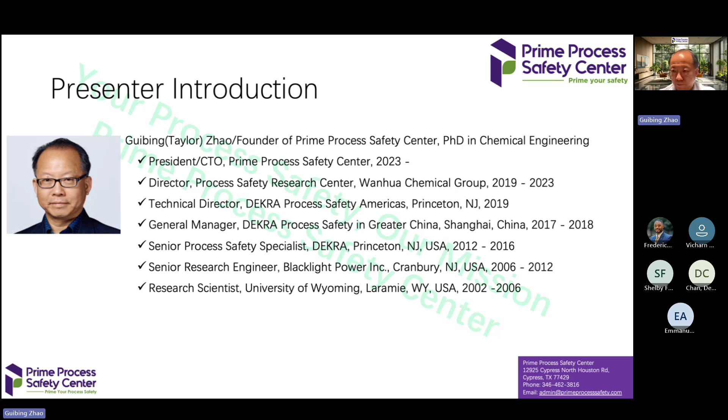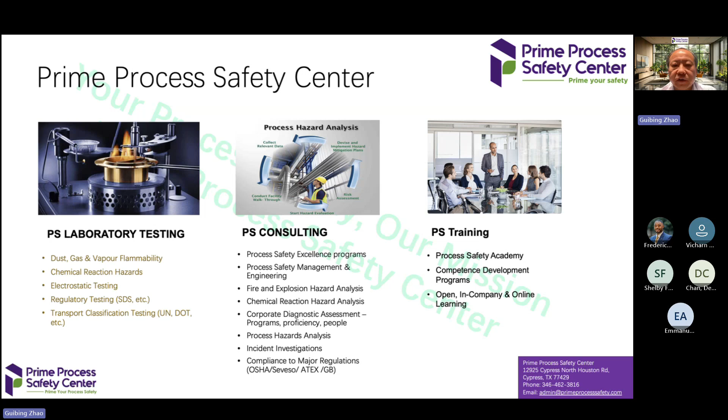So this is our company, Prime Process Safety Center. We have three business sectors. The first one is process safety testing, the second one is consulting, and the third one is training. I'm gonna give you about 10 minutes, a very quick review of what we're doing. First one is the process safety laboratory.

We have a flammability gas and liquid testing lab, and we do lots of tests such as flashpoint testing, UFL, auto ignition temperature, LOC, boiling point, melting point, and Pmax and KG. From there, we can get laminar burning velocity, and we also have a bomb calorimeter. On the right side, you can see lots of pictures of our testing equipment.

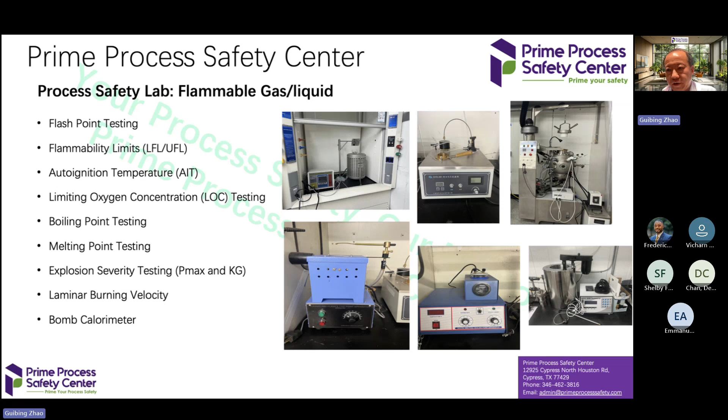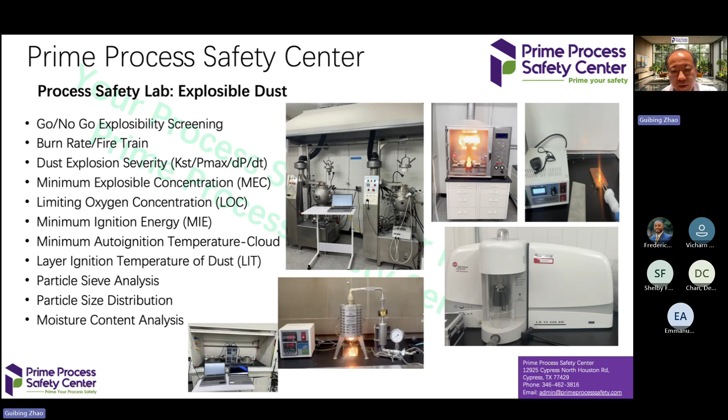We also do combustible dust testing; for anything related to explosibility or combustibility of dust, we do tests, such as go/no-go, burning rate, KSt, Pmax, MEC, LOC, MIE, MIT, particle sieve analysis, particle size distribution analysis, and moisture content analysis. All the testing equipment you can see in the pictures on the right side.

And we also do electrostatic hazard testing. The parameters we can test include volume resistivity, surface resistivity, charge decay time, breakdown voltage, liquid conductivity, flexible FIBC assessment, and we also do electrostatic chargeability tests. With all this data, we can quantitatively analyze the electrostatic hazard in the plant, in operation.

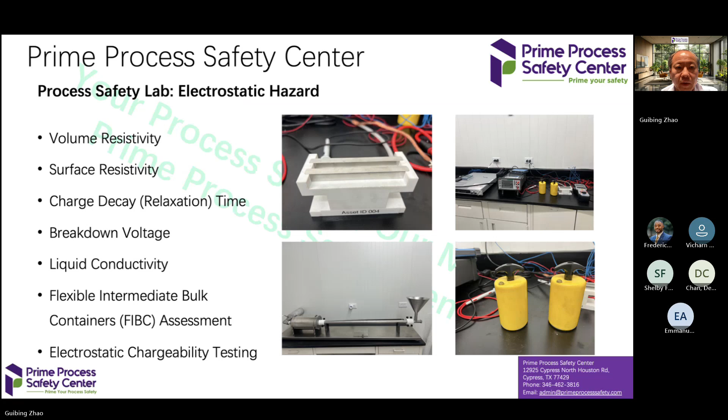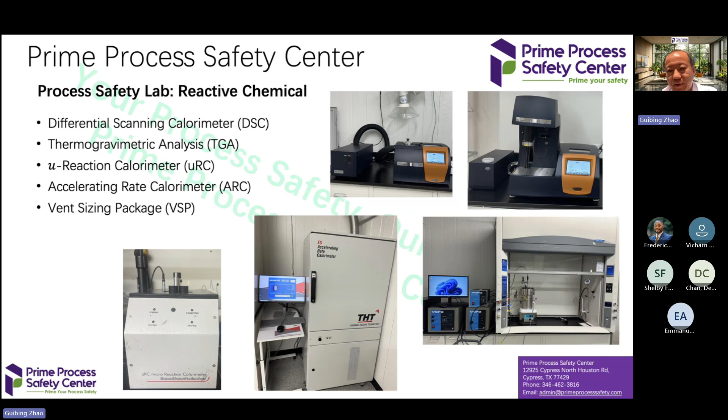We also have a reactive chemical lab. We have DSC, TGA, micro reaction calorimeter, accelerating rate calorimeter, and a VSP2 package. As you can see, all these photos are live pictures from our lab.

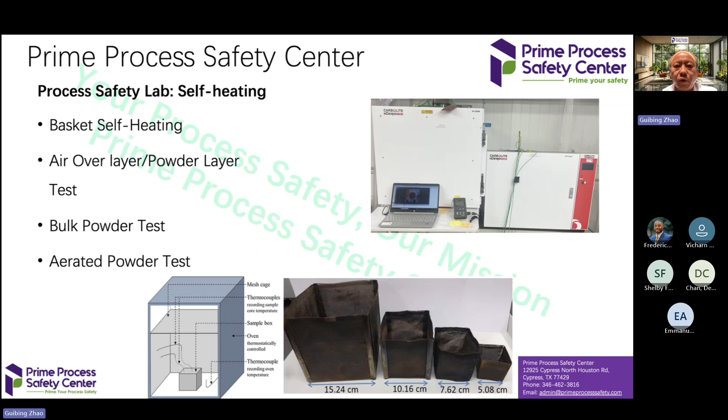And we also do self-heating tests. As you can see on the right side, we have two Carbolite ovens, and we run basket tests, air over layer, powder layer tests, bulk powder tests, and also aerated powder tests. From the basket test, we can see for powder in bulk form and at different sizes, when self-heating happens, what the reaction kinetics look like. With that data, we can help clients identify, for a specific size of powder, the critical ambient temperature which will create a self-heating ignition issue.

Previously, we just talked about the process safety lab. Let's talk about process safety consulting. In process safety consulting, we can do process safety management work, and we also help clients do process safety engineering, such as safeguard design and verification.

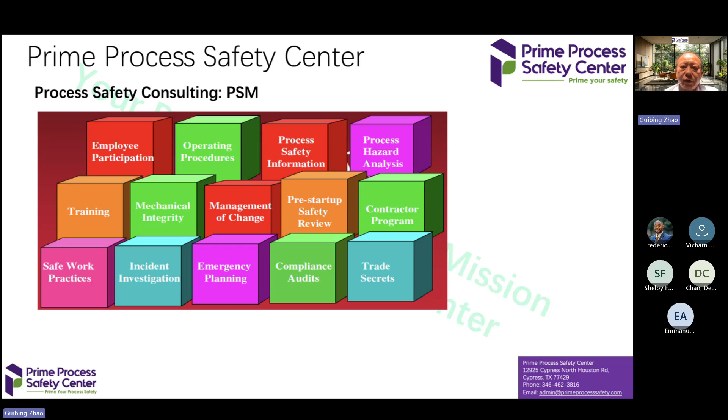In process safety management, the most critical element is process hazard analysis. This process hazard analysis actually includes several levels of analysis, for example HAZOP, LOPA, QRA, and SIL verification. HAZOP is used to identify the hazard, and LOPA is a semi-quantitative analysis of what level of safeguards you have and their effectiveness. Sometimes we call these safeguards IPLs. Not all safeguards are IPLs, but an IPL definitely is a safeguard. And with all these IPLs, what the residual risk is.

Based on that, we can do quantitative risk assessment, which is a detailed numerical risk assessment method, including consequence modeling. And with that, we also perform SIL verification for functional safety. With so many IPLs around, what is the safety integrity level, and what's the gap between the required safety level and what it is in real life. So this is for HAZOP, LOPA, QRA, and SIL verification.

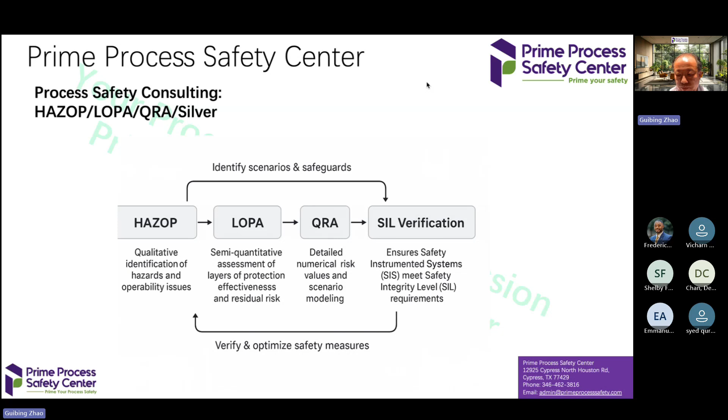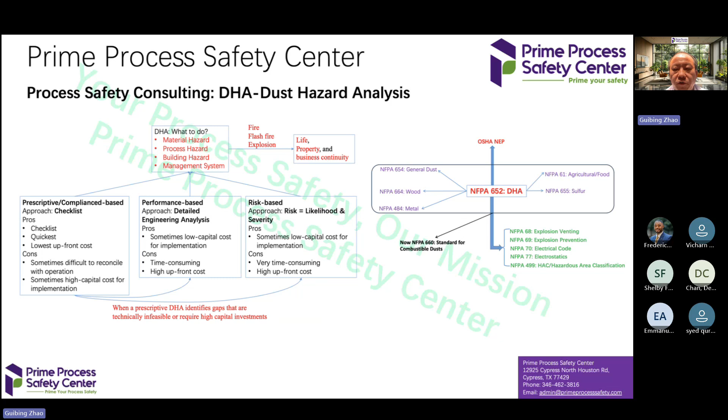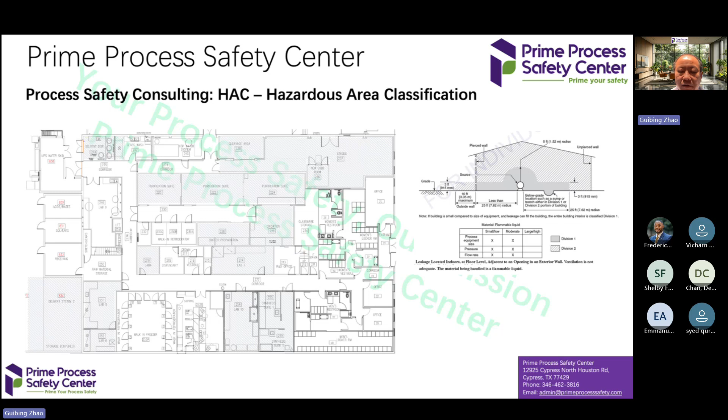And we also do process safety consulting. We also perform DHA; this is a major topic we're going to focus on today. So I'll just go through these pages. And we also do hazardous area classification, to help clients identify in the new operation how likely the plant will have a flammable atmosphere, and also what's the extent of the flammable atmosphere.

We also perform ignition source analysis. In the industry there are many kinds of ignition sources, but the most powerful ones, which we usually see in the industry, include arcs from electrical equipment. Basically, that's related to hazardous area classification. And also you can see electrostatic discharge. This happens a lot as an ignition source in the industry. So we perform ignition source analysis to help clients.

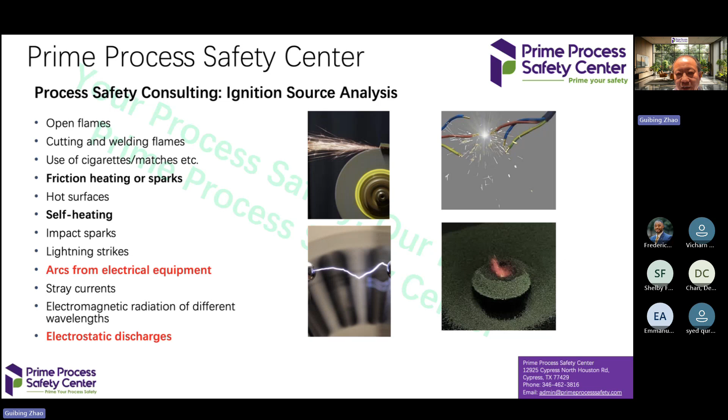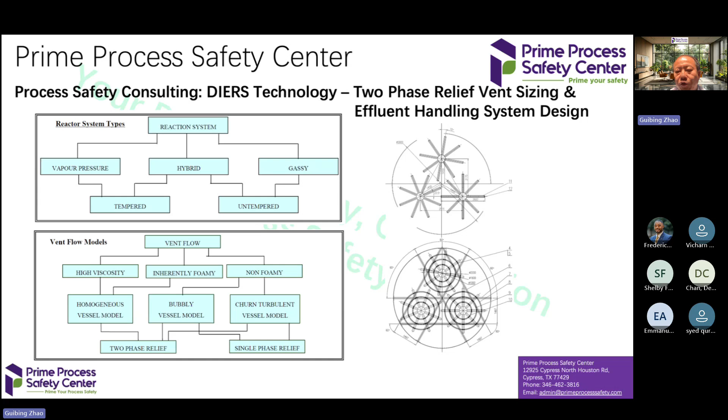And otherwise, we can perform DIERS technology, using it to size rupture disks or pressure relief valves. And also we help clients design effluent handling systems. On the right hand side, you can see this is actually a sparger distribution. We designed a quench pool for clients to handle pressure relief system effluent.

And we also perform incident investigation. As you can see on the left side, there are two pictures. On the bottom, the pipe is intact, but on the top, you see the pipe was burst. This is exactly from a peroxide explosion, which split the pipe and caused a big event. On the right hand side, you can see two dust collectors. One is intact, another one is burned, right?

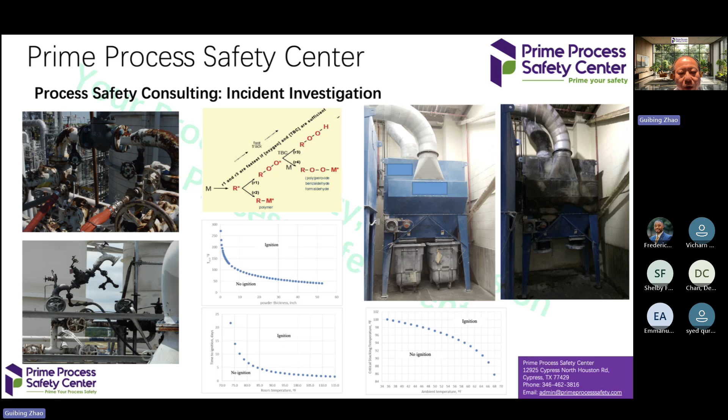So for this type of incident, our incident investigation is very different from general incident investigation. We go deep, dig into the mechanism, and find exactly what's going on in the plant, and help clients accurately identify the problem, and then recommend the accurate safeguards to prevent this from happening again.

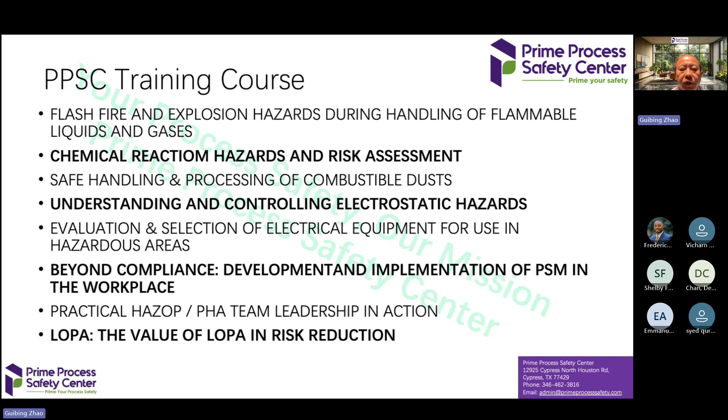And the third sector of our business is process safety training. We have developed lots of process safety training courses, but we're still expanding our training course scope. And from July, we're going to formally deliver our public training courses, either virtually or on-site. So that's basically what we're doing at Prime Process Safety Center.

And this is the main content we're going to deliver for cost-effective DHA. First, I'll share some background, and then we'll talk about the combustible dust hazard, and also review NFPA 652, nowadays NFPA 660. I think probably many of you know it. And I will talk about three methods of dust hazard analysis: prescriptive, performance-based, and risk-based DHA. And what is cost-effective DHA and how you should do it, because DHA methodology is quite controversial in the industry, like what method is best. And finally, we'll give the summary of our talk today.

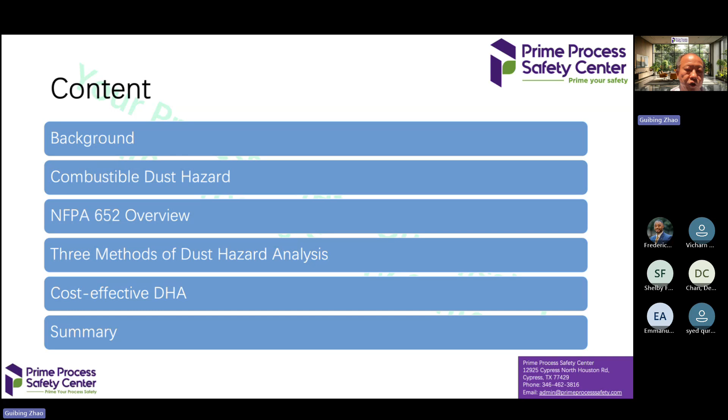So first, to give everybody some background about incidents from dust explosions in the industry. This is from Dust Safety Science, and the data is from the 2022 Combustible Dust Incident Report. You can see the US, Canada, and international, from 2018 to 2022. In the US, fires, explosions, injuries and fatalities go down yearly. This is quite true because the U.S. puts very strong regulatory requirements on the industry to prevent dust explosions.

The Canada data is also trending a little bit down, but it's fluctuating. But globally, you can see the fire and explosion incidents jump back and forth. So from this, you can say globally, dust explosion is definitely a serious issue, and we should pay attention to it.

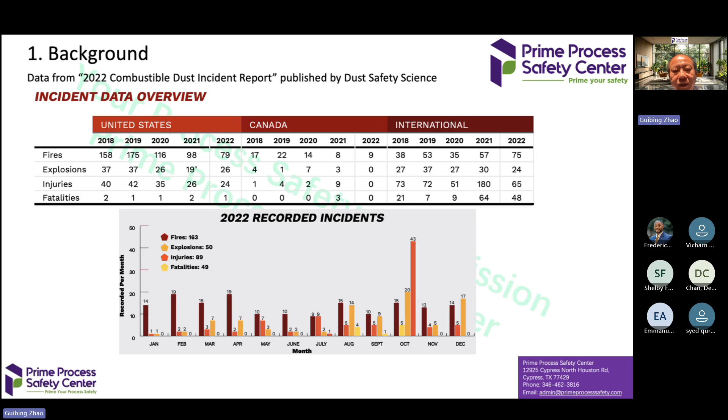The bottom line is the figure for each month in 2022, recording different incidents. For example, in 2022 there were 163 fires, 50 explosions, 89 injuries, and 49 fatalities. But this is only what could be recorded. Everybody knows incidents occur and sometimes people don't expose them, so we don't know. The actual data should be far worse than what we see here.

And from a material point of view, most incidents occurred with food products. The second could be wood products, and the third could be metal or something else. So actually, among dust explosions in the industry, food is a lot. Food occupies a big chunk of all the incidents.

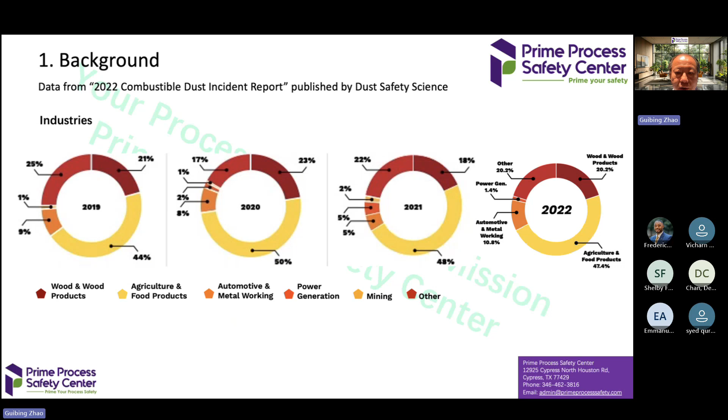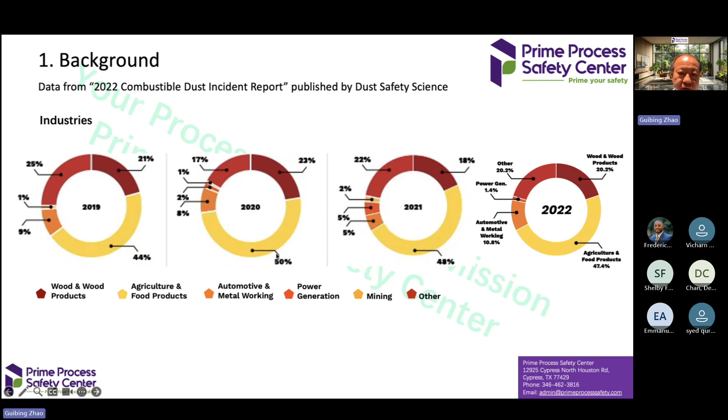As you can see, year by year from 2019 up to 2022, this data changes a little bit, but not significantly, which means the food industry is probably still the worst industry for dust explosions. And this is for industries. This matches the previous data. Food, agriculture, and food product industries have lots of incidents, almost 50% of all industries. As for equipment, we can say the worst case occupies a very big share.

The worst equipment could be like a dust collector. It occupies a big chunk of it. Dust collector, and the second one could be dryer. And the third one is like a silo or other storage. Then you can say other things like elevator, you see.

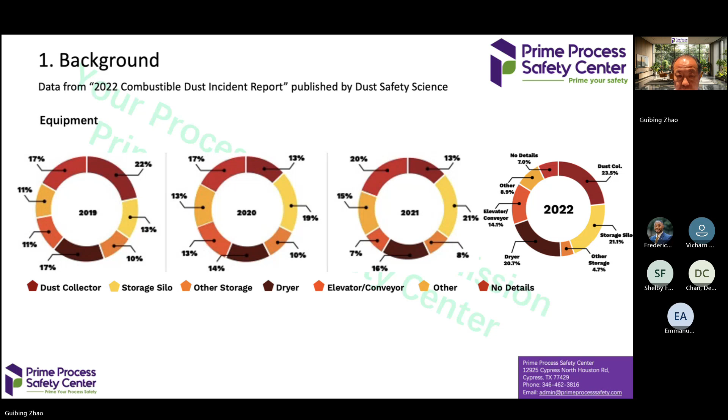So dryer and dust collector definitely are big chunks of dust explosions. This is from recorded data. And this is what's going on for equipment.

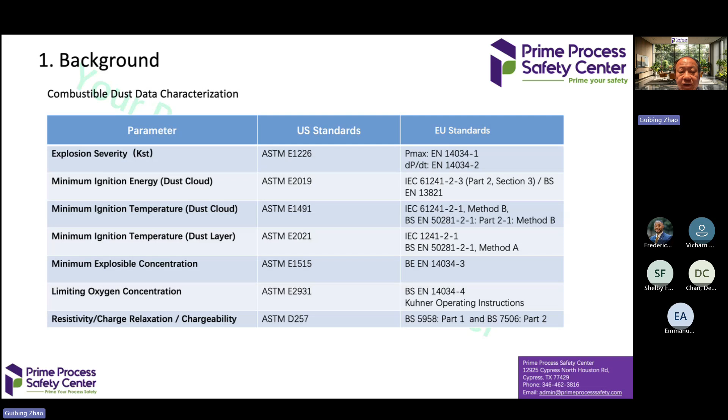So as for combustible dust characterization, before we do any dust hazard analysis, we have to know the material property, material combustibility or explosivity. So for all this, in the US we have ASTM standards for all these parameters, such as KST, MIT, either cloud or layer, and also MEC, and also LOC. We have standards. In Europe, they have different standards for it.

So dust explosion hazard assessment method has been controversial over the years. The major concern in the industry is the cost for DHA and also the cost for getting testing data. I mean, should we do all these tests or only part of them? This is a cost. And also the cost for improvement: after DHA is done and there is a recommendation, we need lots of installation for safeguards.

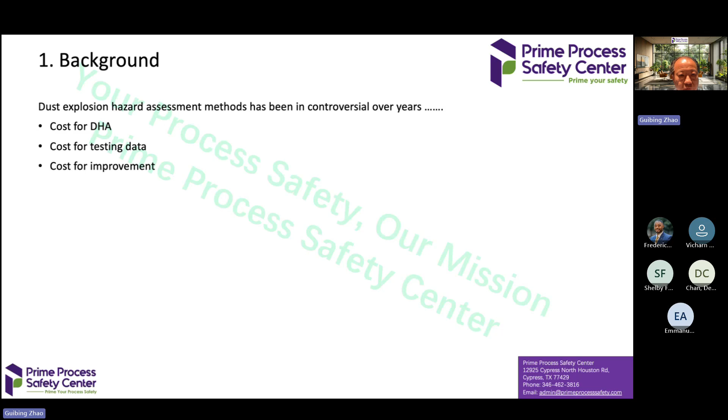So combustible dust hazard, as everybody probably knows, if dust is combustible and we have fuel and ignition, this will only create a fire. For example, a pile of dust on the floor in the air environment, if there's an ignition source, will give a fire. If we suspend the dust as a cloud in an open space, or in an enclosure where the dust cloud volume is very small, we will have a flash fire because we have no pressure effect.

However, if we suspend the dust in an enclosure with confinement, like a big volume of combustible dust cloud occupying an enclosure, for example in equipment or in a room, that will create an explosion. Between flash fire and explosion, the major difference is the pressure effect. However, from the mechanism point of view, flash fire and explosion are the same. Basically, there is flame propagation in the suspended dust cloud.

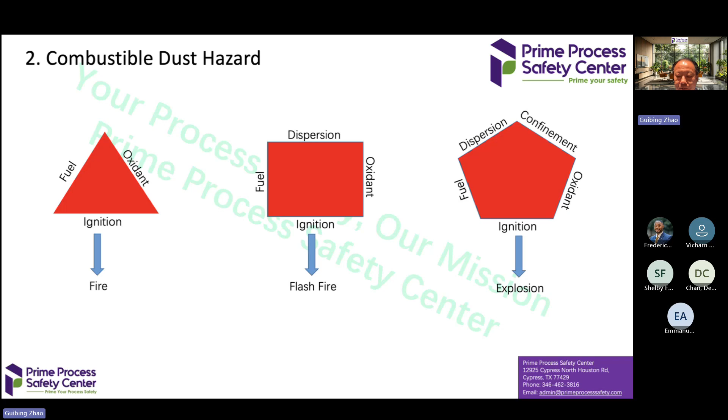For combustible dust hazard, there are several standards that cover it. For example, NFPA 654 covers general dust, NFPA 664 covers wood dust, NFPA 484 covers metal dust, NFPA 61 covers agriculture or food dust, and NFPA 655 covers sulfur dust. Since 2019, NFPA 652 gives the methodology of dust hazard analysis, how to do it.

And nowadays, all these standards are combined together into NFPA 660. It was issued last year and is formally enforced in 2025, the standard for combustible dust. It puts all commodity combustible dust standards together into one centralized standard. As you know, in the US we have the OSHA national emphasis program, which refers to all these standards when OSHA auditors go onsite to do audits. And this is the requirement for different commodity dusts.

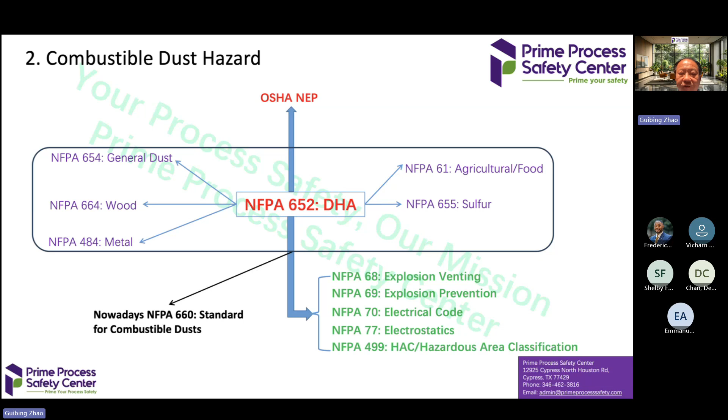However, for dust prevention and venting technology, there are other standards specifically about it. NFPA 68 talks about explosion venting. NFPA 69 is explosion prevention technology, and NFPA 70 is the electrical code, how to prevent electrical ignition sources. NFPA 77 specifically talks about electrostatic ignition sources. NFPA 499 specifies how to classify areas as Class 2 hazardous areas. In that classified area, the right electrical equipment should be selected and installed following NFPA 70, the electrical code. That's basically all the codes and standards covered nowadays.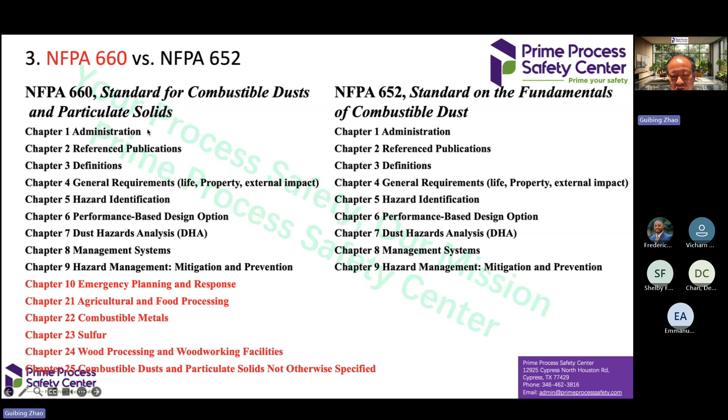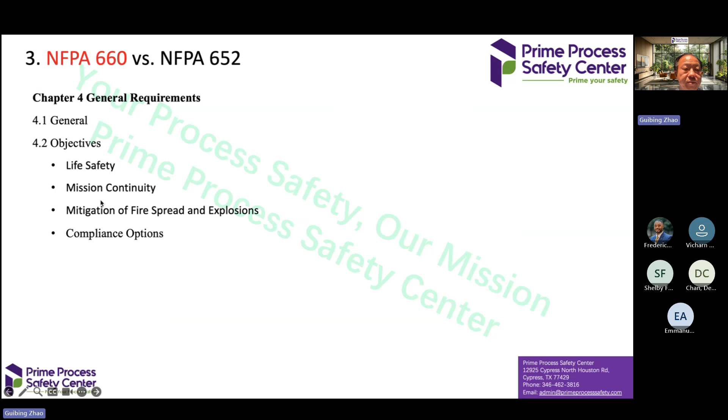As for NFPA Chapter 5, hazard identification, 5.1 and 5.2 are very similar. Basically, industry is required to handle dust, and you have to do combustibility and explosibility testing.

However, in NFPA 660, there is a specific requirement for self-heating and reactivity hazard identification. In all previous standards, NFPA 652 or NFPA 654, this part of information was always kept reserved, but in NFPA 660 this was specified. I'm going to take some time to explain this to everyone, okay?

For combustibility and explosibility, they are very much the same, and also sampling. But here, for combustibility and explosibility tests, I want to give a little bit more detail.

If a test goes, we recommend doing a combustible dust go/no-go test. If it's a go, that means it's explodable, and automatically the dust becomes combustible. However, if the dust shows no-go, that means if you ignite it, the flame cannot propagate. But you still need to go to a combustibility test to identify if you have fire hazard or not.

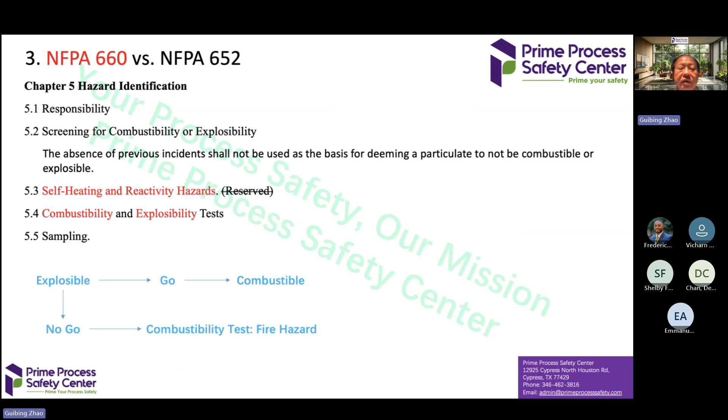If you have fire hazard, then you will have some specific requirements for it. So for all these standards, if it shows no-go, it doesn't mean you don't need to do anything. You still need to check if you have fire hazard or not. If you do, you need to take steps on how to prevent or mitigate the fire hazard.

For fire hazard, for combustibility test, NFPA 660 or NFPA 652 recommend performing a burning rate test using UN DOT testing N.1, test method for readily combustible solids. If this shows there is no reaction or no glowing, that means the material is not combustible. So this is the combustibility test.

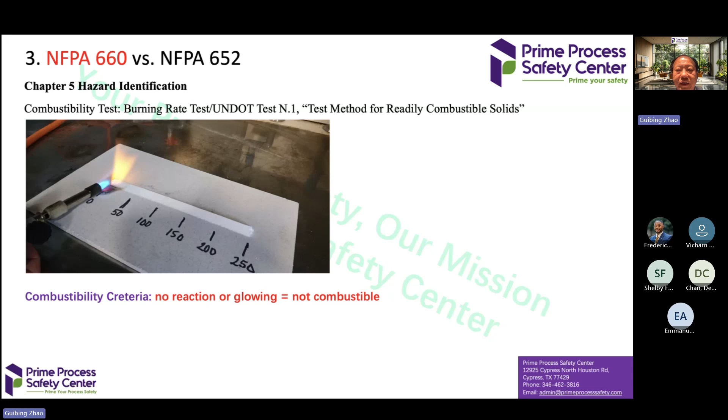Next, for self-heating and reactivity hazard identification, NFPA 660 gives specific requirements which were not shown in previous codes and standards. For example, for self-heating hazard evaluation, NFPA 660 requires that if you do bulk storage or transport of combustible dust with quantity of 1,000 kilograms or larger, you have to do self-heating hazard testing to demonstrate your material is not self-heating.

Also, if you have a dryer and discharging bins and hoppers, if it's more than 10 kilos or higher temperature, then you also need to do self-heating hazard evaluation. Or if you went to DHA, if an engineer points out you have self-heating potential, then you need to do it.

For thermal instability, also for more than 1,000 kilograms of combustible particulate, if you store it longer than 8 hours in a bin or hopper, or at a temperature higher than 30 degrees C, you have to demonstrate your thermal stability hazard, whether you have it or not.

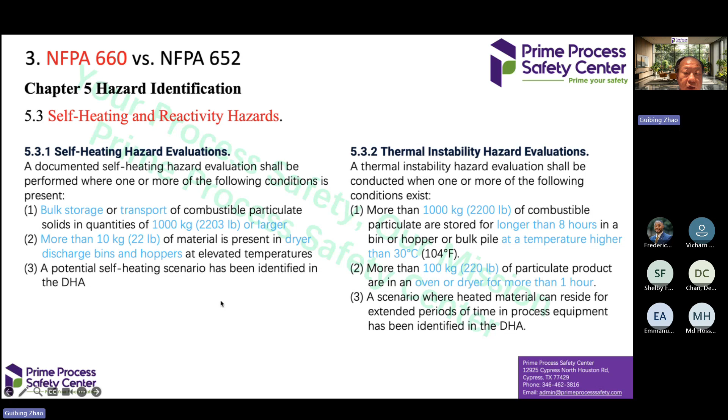The third one is water reactivity hazard evaluation. We also need to do tests to demonstrate the water-based fire suppression system is okay in your system. Also, for a particular product or dust that can be exposed to process water, condensed water vapor, or outdoor precipitation, you need to demonstrate whether your material is water reactive or not.

This type of thing is very necessary because in industry, for example, with aluminum dust, there have been lots of incidents. For example, with an outdoor dust collector, during winter daytime, hot humid air goes in. At night, temperature goes down and it condenses in there. It will react with aluminum to form hydrogen, which is very flammable.

This incident occurs in the industry a lot. Another thing to check is chemical reactivity hazard, which basically addresses incompatibility of the material you are handling. Are you mixing two powder materials, or is this material compatible with the construction of the equipment or whatsoever?

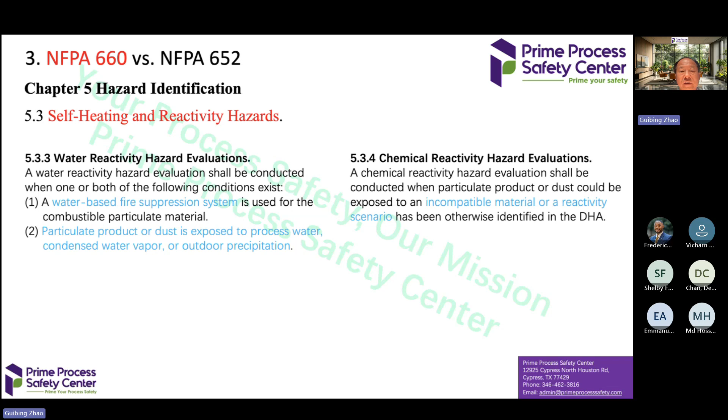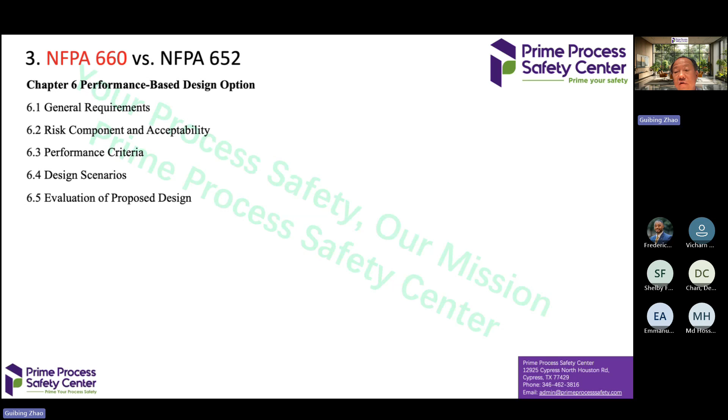So NFPA chapter 6 covers the performance-based design option, and NFPA 660 and NFPA 652 are very similar. For performance-based design, the design criteria need to consider life safety from fire and explosion hazard, and also structural integrity. If something happens, is your structure okay or not? If it's not okay, then you need to consider explosion venting for the building, room, whatever, and also mission continuity.

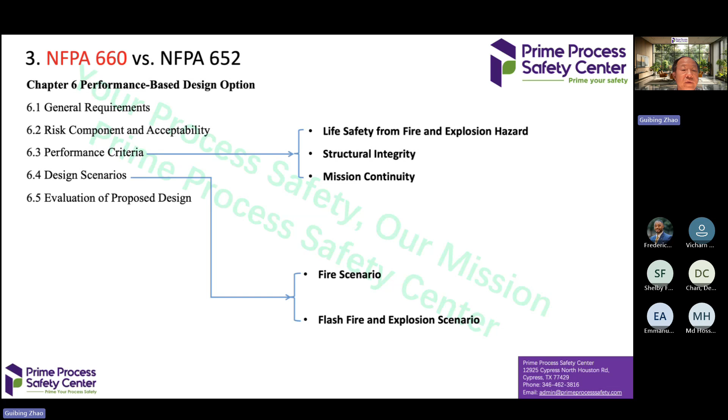So this is for performance criteria. As for design scenario, if you are handling combustible dust, you always need to consider fire scenario and also flash fire and explosion scenario. This has to be considered for performance-based design.

NFPA 660 and NFPA 652, chapter 7, talk about the DHA methodology. Basically, if you look at it, NFPA 660 and NFPA 652 are very similar. It's just that NFPA 660 is worded in a different way. For example, both of them require DHA to be reviewed and updated every 5 years.

And also for DHA, who is going to do it? The person has to be qualified, meaning they have to understand NFPA codes and standards, understand the material properties, and have experience working in this field for quite a period of time.

As for methodology, generally both talk about combustible dust. The hazards we have to identify are fire hazard, flash fire hazard, and explosion hazard. For a qualified DHA report, we first have to identify where you have hazard, either in the process equipment or external of the process equipment, meaning the building hosting the process. So first is identify hazard.

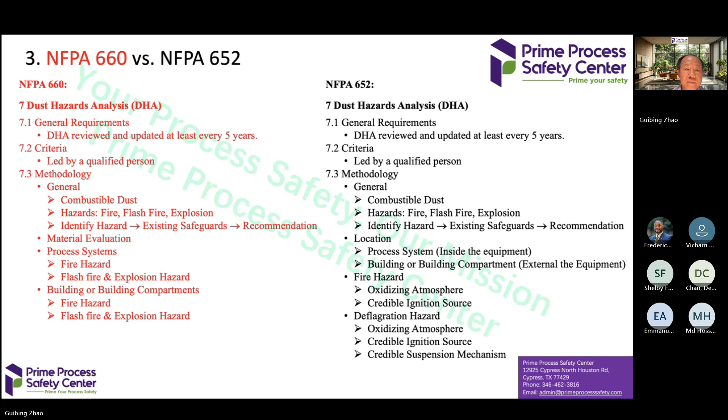Chapter 8 talks about the management system. As you can see nowadays, for combustible dust, the management system is very similar to OSHA's process safety management program, that standard. So in industry, the mindset or methodology of PSM is very, very good, and should be adopted by general industry.

As for specific to combustible dust, if you look at all this, there are elements it covers, I put a tick there. Basically every tick, this item corresponds to an element of the process safety management program.

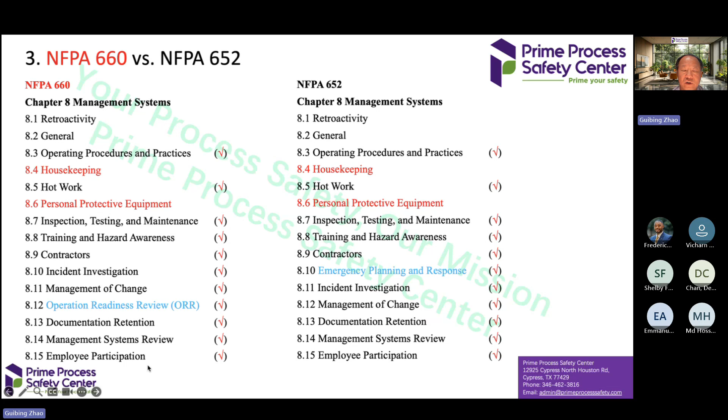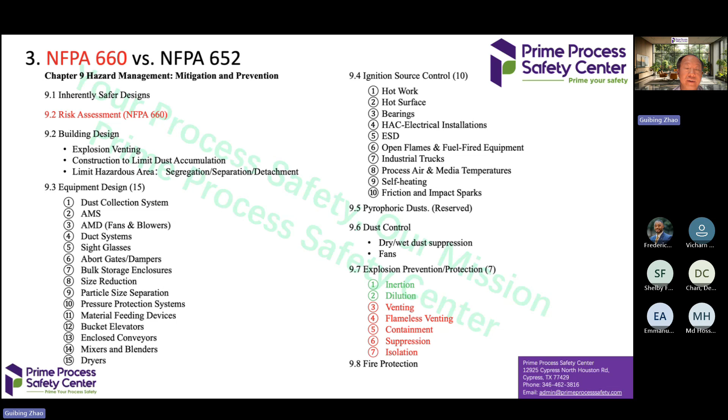So that means if you're handling combustible dust, you need to have a system in place to protect the system. Chapter 9 talks about hazard management, which is mitigation and prevention methods. NFPA 660 and NFPA 652 are very similar, with only one section in NFPA 660 talking about risk assessment methodology. So that's why we usually say for DHA, there are three methods we should take, based on your specific requirement.

As you can see, NFPA acknowledges three methods to do DHA. The first one is a prescriptive method. For this method, basically you need to go on-site, look at how the industry is handling combustible material and combustible dust, and then walk through the plant and check what existing safeguards are in place.

And as you can see, usually for the prescriptive method, front cost is low. However, to do prescriptive DHA, the people doing this DHA should have a good understanding of codes and standards, and be familiar with the equipment in the plant. They should understand the process, the equipment, how it works, and also what the codes and standards say. So usually the front cost is low, and improvement cost may be high, because whatever you're doing, you need to follow the standard. So sometimes improvement cost could be high, and you also need a qualified, knowledgeable DHA leader or facilitator.

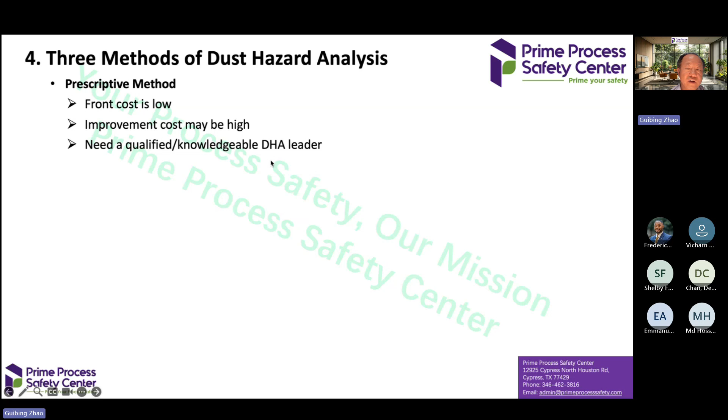Another method, like in NFPA chapter 6, talks about performance-based design. It's a performance-based methodology. Usually this one's front cost is high too, needing lots of analysis and engineering calculation. I'm going to give you a case later. Improvement cost may be low, it depends. You need a qualified, very knowledgeable senior DHA leader to complete this type of analysis.

Another one is the risk-based method, which is also acknowledged by NFPA. The front cost sometimes can be very high and very time-consuming, because for the risk-based method, industry usually uses the HAZOP method to identify combustible dust hazards. For HAZOP, you need a team of people to sit together and go equipment by equipment, pipe by pipe, and lots of time is needed - usually one node takes 2 to 3 hours. There's a lot of dedication of people, and improvement cost sometimes can be low.

When we run risk-based, for example, like whatever MIE, even larger than 1,000 millijoules - we talk about MIE and ignition source - from a risk point of view you still have risk. However, for prescriptive, if for some specific operation the MIE is 1,000 millijoules, you can immediately say it's impossible for electrostatic to be a credible ignition source, something like that. This also needs a qualified, very knowledgeable risk assessment DHA person to complete.

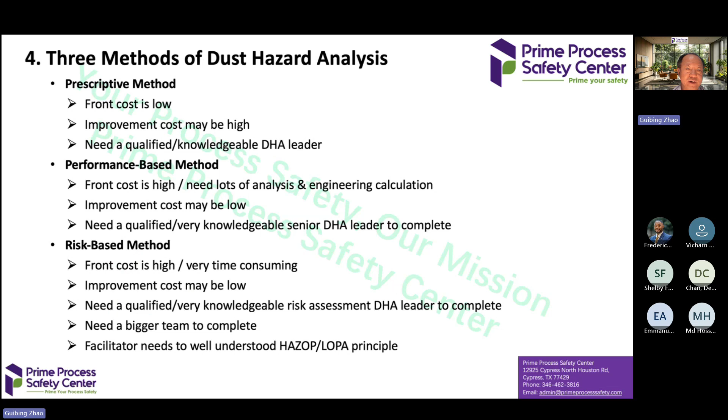Because you need to dedicate so much time there, that's a major challenge in the industry when using risk-based methodology. So based on our experience, we recommend a cost-effective DHA. For example, for a process, we would recommend first doing the prescriptive method - go on-site and check what you're doing for the whole facility, check what safeguards you have, where you have hazards, and based on that give recommendations on what to do. If all these recommendations are acceptable, then it's done. This can be done very quickly, and cost is low too.

And for some more specific operations - I'm going to give an example later - you may find the cost is too high to follow the prescriptive recommendation from NFPA. Then we will identify that for that specific equipment, we may do a performance-based method: what's the hazard, what's the risk of having a combustible dust explosion. Or we can run a risk-based method for this specific equipment and check what should be done. If in that case the risk is really low, without any action, you don't need to do much, and then you're okay.

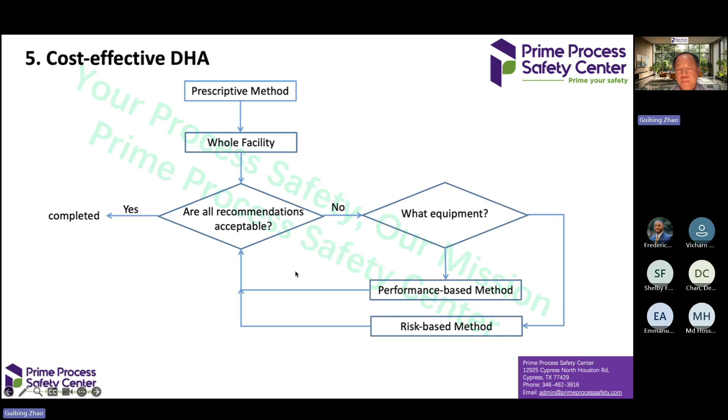This quite makes sense. For DHA, what we do first is check the material hazard - whether the material is combustible or explosible or not - and understand the process hazard, building hazard, and check the management system. So if you are handling combustible dust, overall we need to consider fire hazard, flash fire hazard, and also explosion hazard, majorly focused on protecting life, property, and business continuity.

So, for example, to do this DHA, we can first run a prescriptive, compliance-based approach. Basically, check where the hazard is. Do you have protection? And is that protection adequate or not, based on the code and standard?

So the benefit, the advantage, is that it's a checklist and can be done very quickly, with the lowest upfront cost. That means the DHA cost is lower. But the cons are that it's sometimes difficult to reconcile with operation, and sometimes there's a high capital cost for implementation of the recommendation.

The second method is the performance-based method, and this needs detailed engineering analysis. The good thing is sometimes a low capital cost for implementation, and I said sometimes, not always. The big con is that it's very time consuming, with a high upfront cost. That means somebody will go through detailed calculations, may spend lots of time, and time is money.

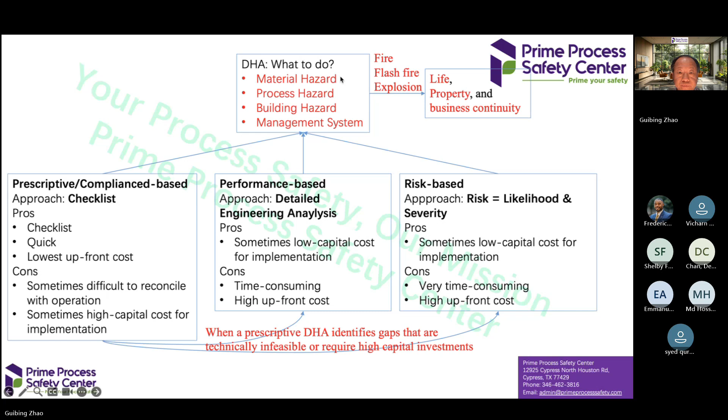So let me give you an example of a cost-effective DHA. For example, this process has a dust collector, with many hoods to capture dust from the process through the ductwork to the dust collector. This is the filter bag. Clean air exhausts through a fan to the outside. And here there's a screw conveyor; the collected dust goes to the screw conveyor for dust disposal.

For this dust collection system, if we follow the NFPA recommendation, for general dust we need an airflow velocity of at least 20 meters per second. If the airflow velocity is higher, you may need a bigger fan or consume more energy, which is operation cost. If we use prescriptive measures, that means we have to design for a high gas flow velocity.

However, in some situations our fan is already ordered and already on site, so what can you do? In this case, if it's hard to implement, we can consider the performance DHA. For a performance DHA, we basically need to understand why we need 20 meters per second or higher.

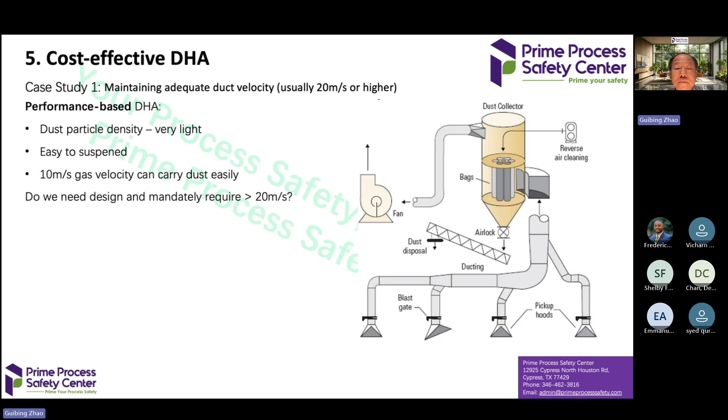So we understand this performance, and then for a specific operation we look at the dust particle density and the terminal velocity of this dust. If this dust is very light and very easy to suspend, maybe 10 meters per second gas velocity can carry all the dust, so we may not need 20 meters per second. This is based on performance: you understand the performance behind the parameter recommended by NFPA, and if our specific dust can meet this performance, we can overcome this.

So in this situation, if our dust is very light and we can prove that 10 meters per second can carry the dust with low dust accumulation in the ductwork, for example we inspect every 2 weeks at the very beginning, later every 1 month, 2 months, and find no dust accumulating in the ductwork, it meets the performance of low dust accumulation as required by NFPA. Then we don't need a very high gas velocity, and it's still operable.

Let's give another case. This type of design is utilized in pharmaceutical companies. Sometimes in a pharmaceutical company, for an API that is a very toxic material, they use, for example, a filter like a dust collector as containment, and the clean air goes to a second dust collector, mainly from a toxicity point of view. They want this like a HEPA filter, and then release the gas out.

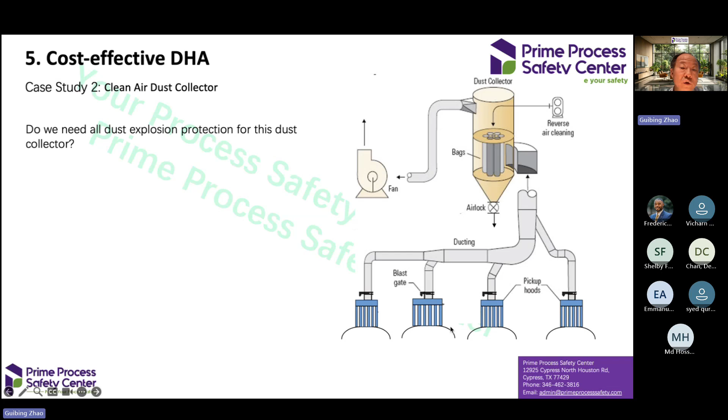However, in this specific case, you see we have a filter. If this filter has a pressure difference interlock and lots of sensors, we can do a risk-based approach. For example, if this is indoor and we follow the prescriptive method, you need to do lots of things. Maybe the cost is very high to do all the dust explosion protection.

However, in this case, we can run a risk-based approach, and we will ask, for example, how much dust can be collected yearly, monthly, weekly in this dust collector. If very little dust is collected, that means in a year you can barely collect dust which can create a dust cloud more than the MEC. Under that case, the likelihood of a dust explosion hazard in this dust collector is very small, and you probably can avoid costly installation of explosion protection or prevention.

Otherwise, for example, how often do you do air injection to dedust the filter? If you do it very often, some dust can be suspended in the dirty side and may form an explosible dust cloud. And how to prevent bag leakage of dust downstream. You ask lots of questions and analyze this. For example, when would the reverse air injection be planned, and what action should be done during reverse air injection? What is the likelihood of dust explosion in this dust collector? And we do all this analysis.

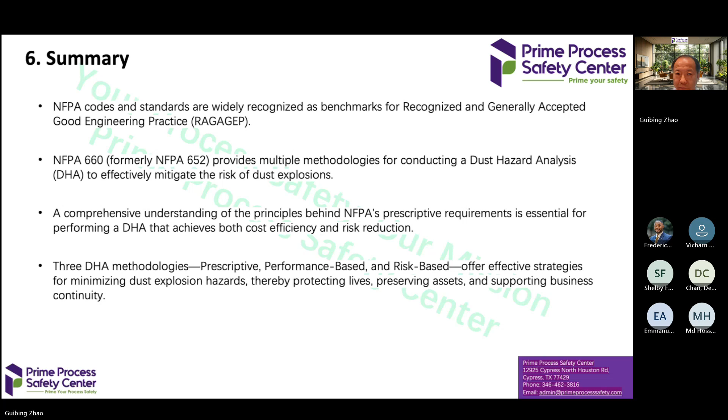Thanks for the session today. Really appreciate all the details. I have a question or clarification on one of the slides about cost-effective DHA, the case study of the dust collector with a risk-based approach, maybe two or three slides back. This one, right, Danny? Yeah, correct. So in this risk-based approach, we can use a qualitative approach, because I don't believe this one is quantitative, to do a risk-based assessment to prove that the system is working, or that we need more engineering controls, etc.

Yes, you are right. And based on what you have in the plant, for example, if you have your own risk matrix. Of course, to do this risk-based DHA, there are lots of details we need to go through: ask each scenario, what's the likelihood, and what's the severity.

But severity could be very high because it's combustible dust, right? But mainly it's likelihood, how many credits we can take. So the best way to do risk assessment for this one is to use a semi-quantitative analysis, integrating the LOPA method with HAZOP. That will be best to demonstrate your risk is low enough and you don't need to do anything. I did several projects for a big car manufacturing company in Austin last month, and it was very successful.

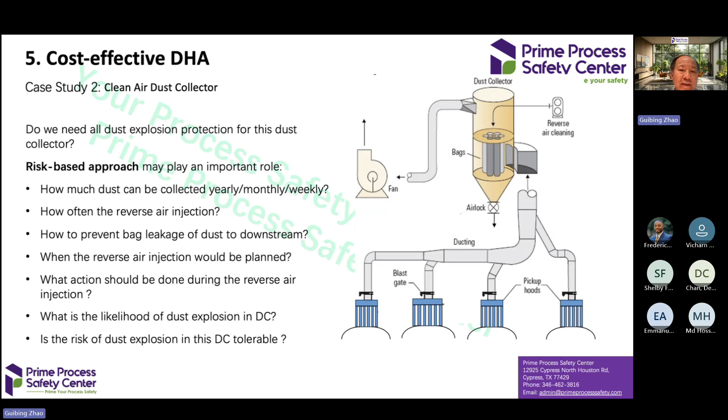If we just use qualitative analysis, sometimes it's kind of vague, and regulatory people look at your report and feel it's too qualitative. There is no data to prove whatever you're talking about, different people have different opinions, and sometimes it's hard to get regulatory people to pass your DHA method. As for performance-based design, this approach involves lots of engineering calculation. Performance-based DHA is not useful for all operations. For this example, it's very easy to use because you have numbers and you can easily plug them in to calculate based on the material's properties. This performance-based calculation is relatively easy to do. But for some other things, it's kind of hard.

For example, for some dust collectors, if you do pressure containment, that means a high pressure requirement. You need to know exactly the pressure and stress of the dust collector, and also the interconnected equipment or vessels. Sometimes performance-based design is tough, but it's doable for a specific one. If we feel the performance-based method is not quite applicable, we tell clients maybe pursuing risk-based is best. Of course, we recommend the prescriptive method first. For some specific processes, if it's hard to implement based on prescriptive DHA, then we pursue performance-based.